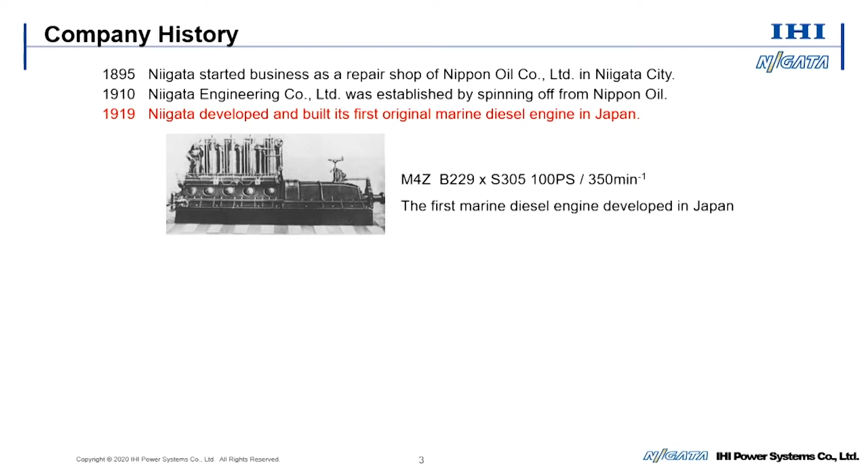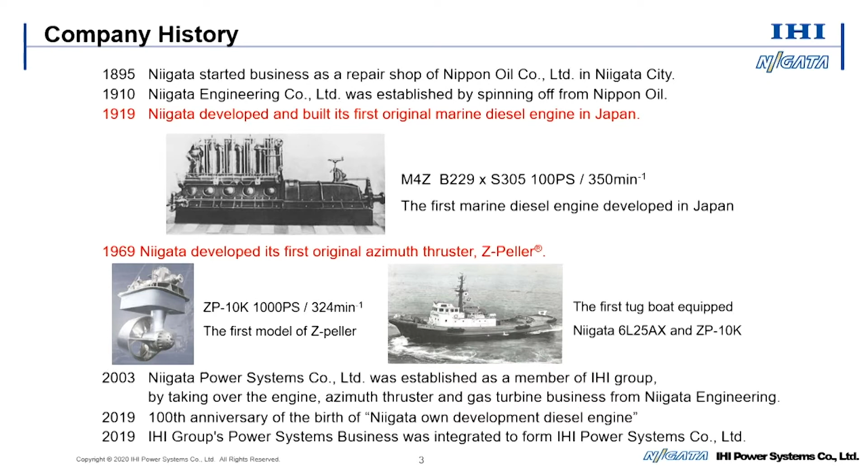This is Niigata history. In 1919, Niigata developed and built its first original marine diesel engine in Japan. 50 years later, Niigata developed its first original azimuth thruster, Z-Peller. Company name is IHI Power Systems. However, we are often called Niigata or IPS in general.

Niigata is one of the leading designers and builders of reciprocating and gas turbine engines for marine power plants and locomotives. In the marine field, IPS supplies Z-Peller as the best propulsion package for tugboats and offshore support vessels. Of course, our products are used for other types of ships, such as fishing vessels and cargo ships.

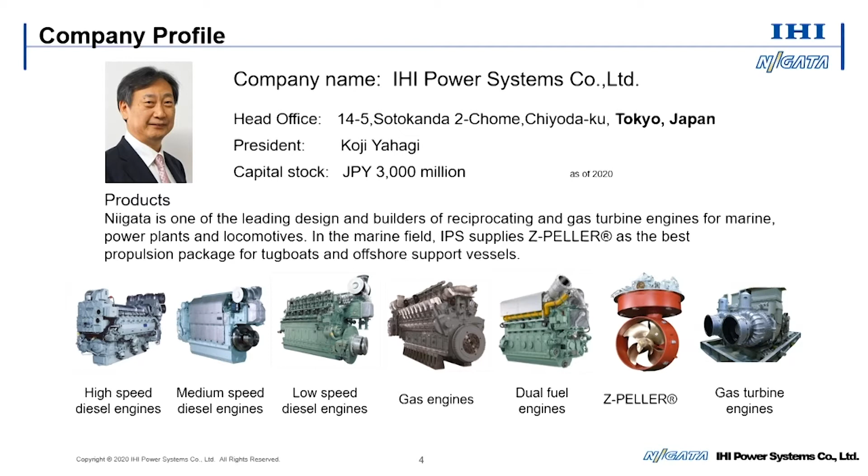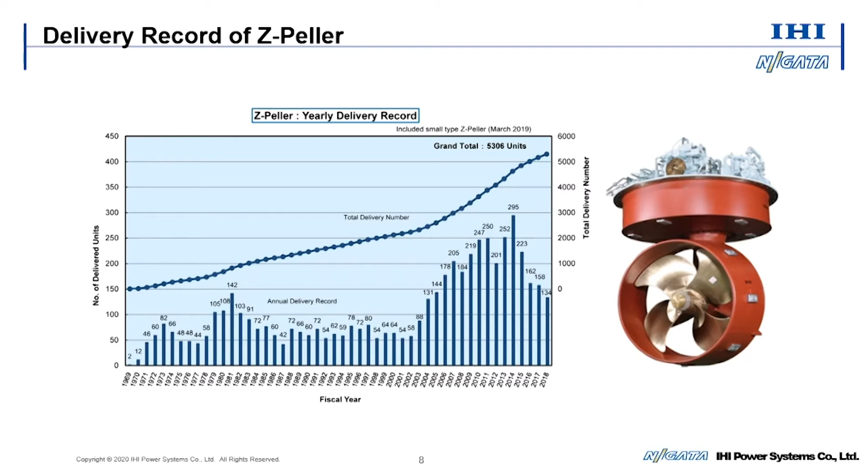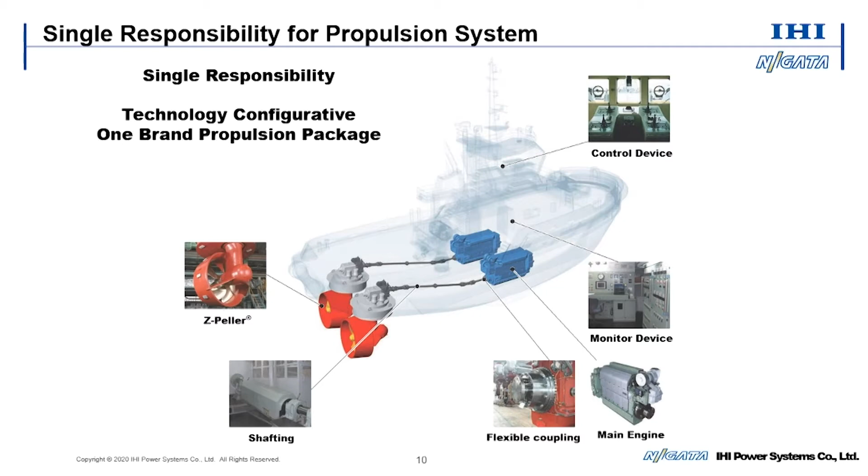Our strong point is single responsibility for the propulsion system. We handle these products: main engine, flexible coupling, intermediate shafts, Z-Peller, control device, and monitor device for the propulsion system in a single bundled package. Customers do not need to worry about mismatch in the propulsion system, be it capability, capacity, or performance, and so on. And we can also realize various requests such as bollard pull and vessel speed for the propulsion system. Customer support is also handled as single responsibility. Customers don't need to call many manufacturers for service.

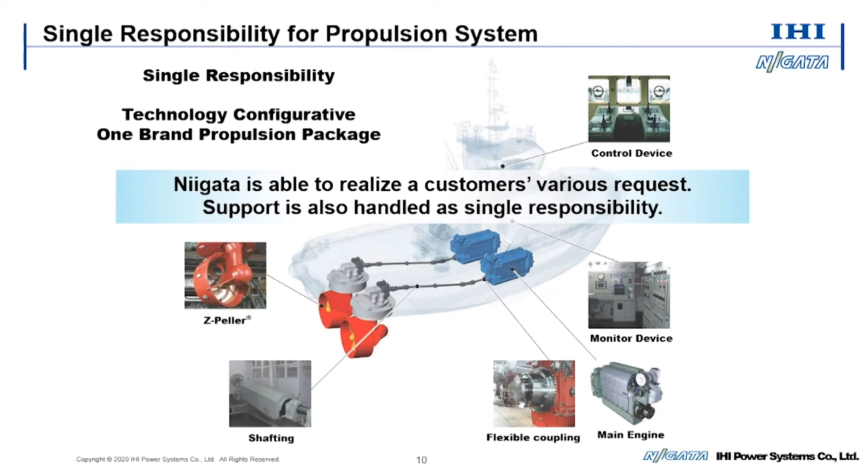This table shows our propulsion package. The left side column shows bollard pull values of a package, the middle columns show main engine model, engine speed, and rating power, and the right side columns show Z-Peller model. For fixed pitch propeller, middle range power packages from 40 tons to 80 tons are popular for harbor tugboats. Higher range power packages from 70 tons to 100 tons are popular for offshore support vessels and anchor handling tugboats. For controllable pitch propeller, the bollard pull values of packages are from 45 tons to 110 tons.

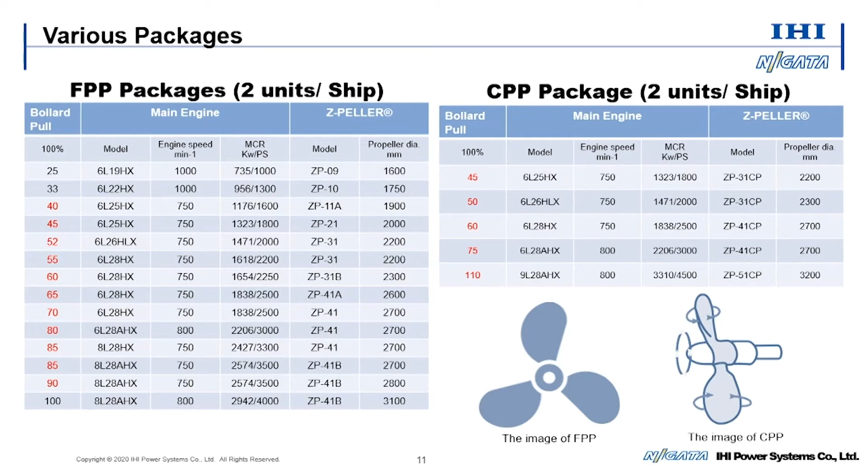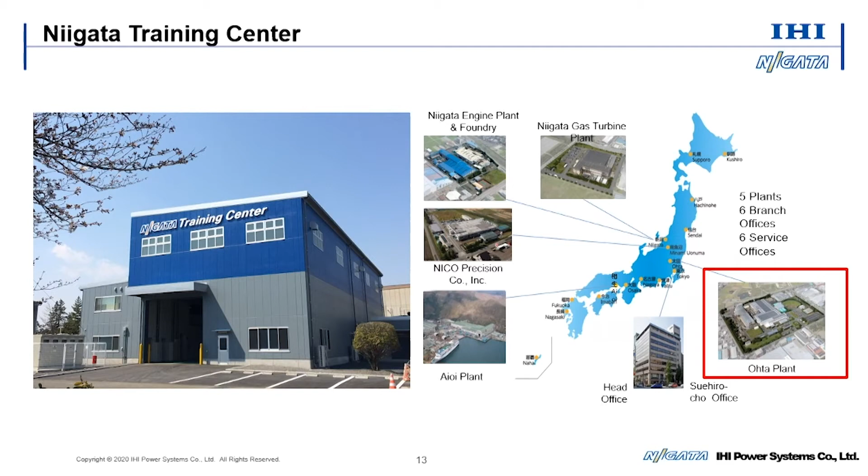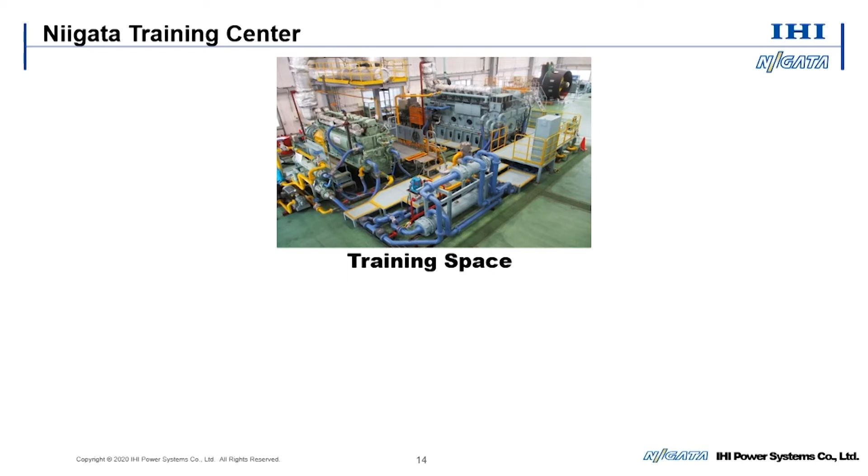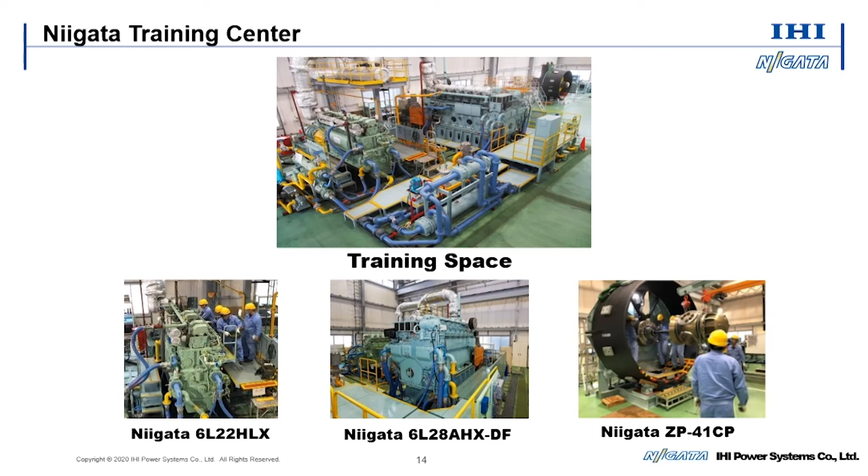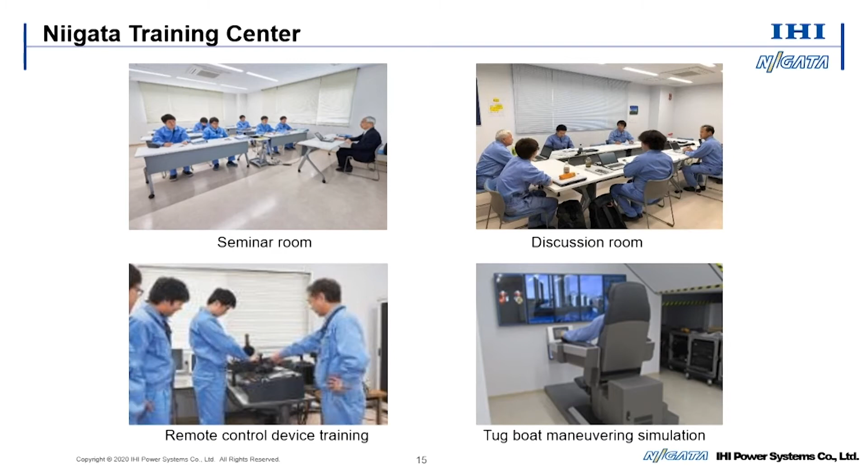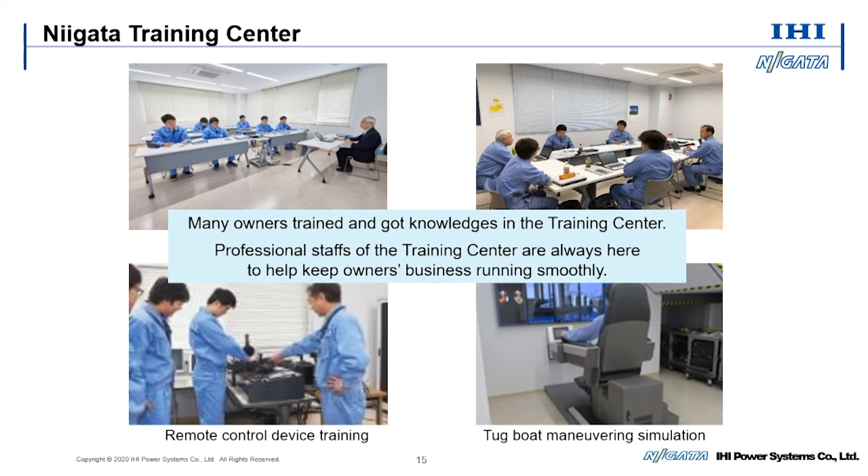In detail, middle speed engine 6L22HLX, dual fuel engine 6L28AHX-DF, azimuth thruster Z-Peller 41CP. Various training is possible, such as parts disassembly and assembly training. The training center has not only engine and Z-Peller training spaces, but also various facilities as shown in these pictures. Actually, many owners have been trained and received their certificates as our approved engineers in the training center. Okay, that's all I wanted to say about our technical support.

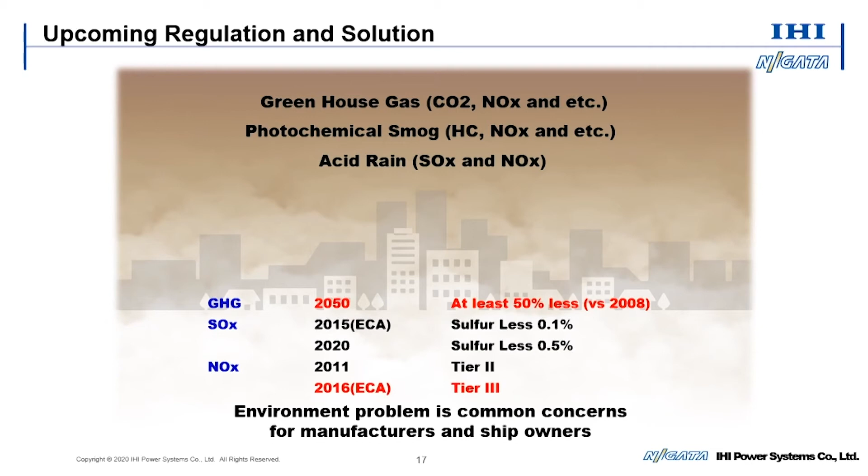Fourthly, I'd like to talk about dual fuel engine. Global environmental problems such as greenhouse gas, photochemical smog, and acid rain are getting more and more serious. These are current and upcoming regulations for the above problems. These regulations, especially those in red wording, are important for the shipping industry. Therefore, green ship technologies are necessary for the industry's future.

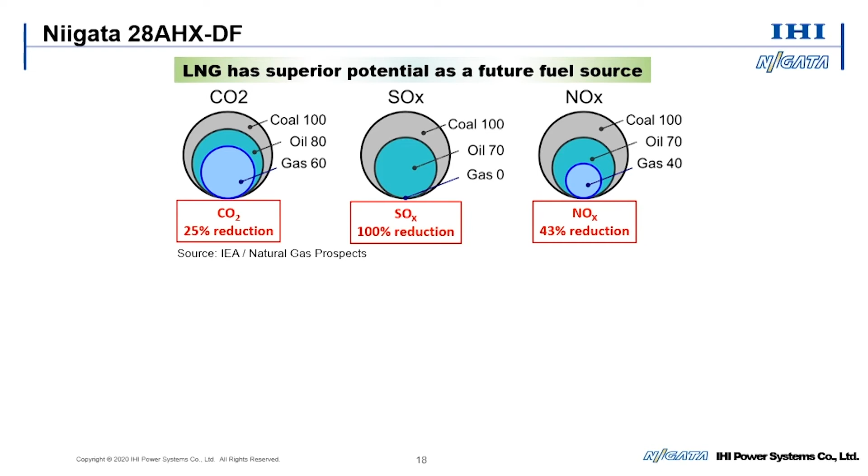LNG is a leading candidate as a clean fuel of the near future. As you can see, LNG has superior potential as a future fuel source. Our dual fuel engine, Niigata 6L28AHX-DF, uses LNG as a main fuel. This graph shows NOx regulation tiers. In gas operation, when this engine uses LNG as a fuel, the amount of NOx emissions satisfies Tier 3.

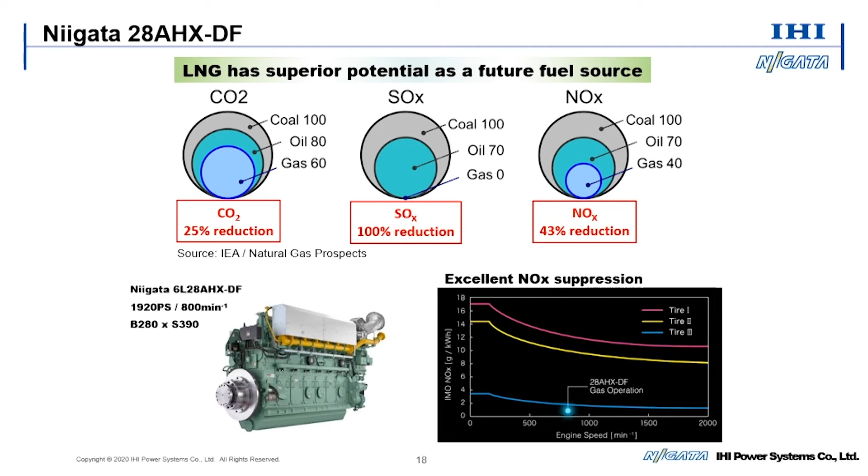This table shows main specifications. Diesel oil is also used as a pilot fuel. This dual fuel system realizes high response speed for tough situations. Perhaps you worry that the calorie of LNG is less than diesel oil and the response speed of a gas engine is slow. Also, perhaps you worry that this dual fuel engine cannot apply to the rapid load situations of a tugboat. Let me say the result. You don't need to worry.

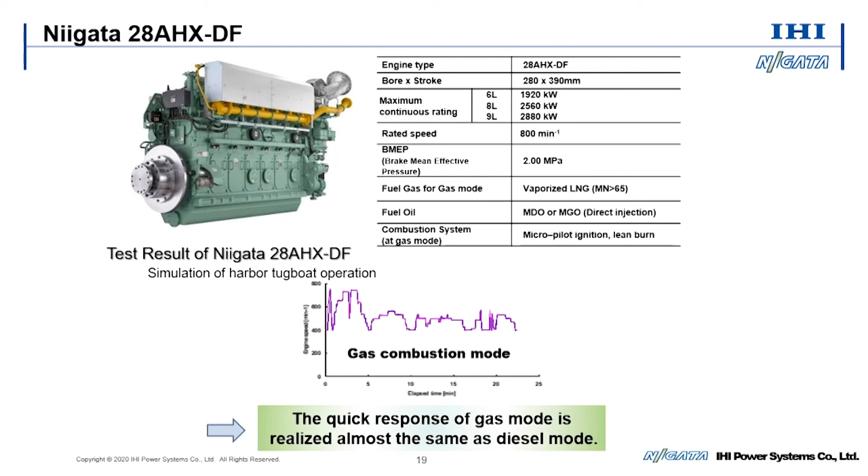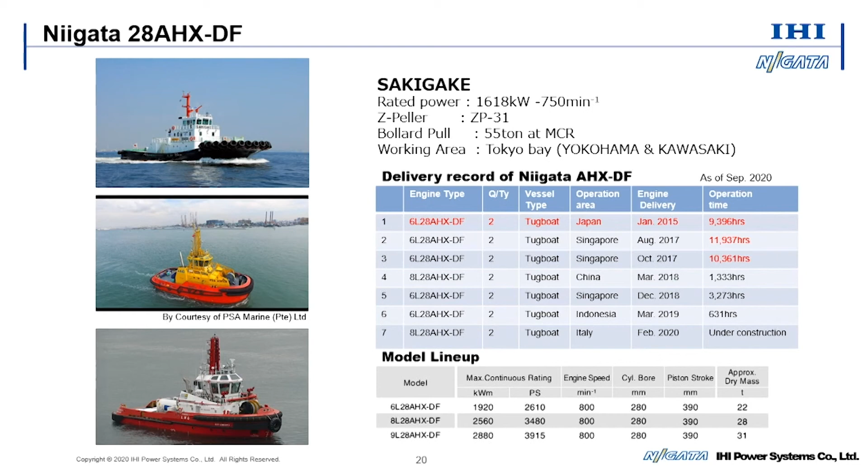Let's turn to the delivery record of our dual fuel engine. The left side pictures are tugboats equipped with Niigata dual fuel engines. This table shows the delivery record of Niigata AHX-DF. Operating time of some tugboats is over 10,000 hours. That means these tugboats are used equally to a typical tugboat having a diesel engine. This table shows the model lineup of AHX-DF. AHX-DF has a wide power range. So, I explained our dual fuel engine.

Finally, I'll talk about green ship technology. Our dual fuel engine itself is able to satisfy Tier 3 regulation. However, it is possible to satisfy the regulation for a diesel engine by applying an SCR system. We also handle SCR system devices. As environmental regulations for specific areas have been issued in recent years, we believe demand for SCR systems is going to increase in the near future.

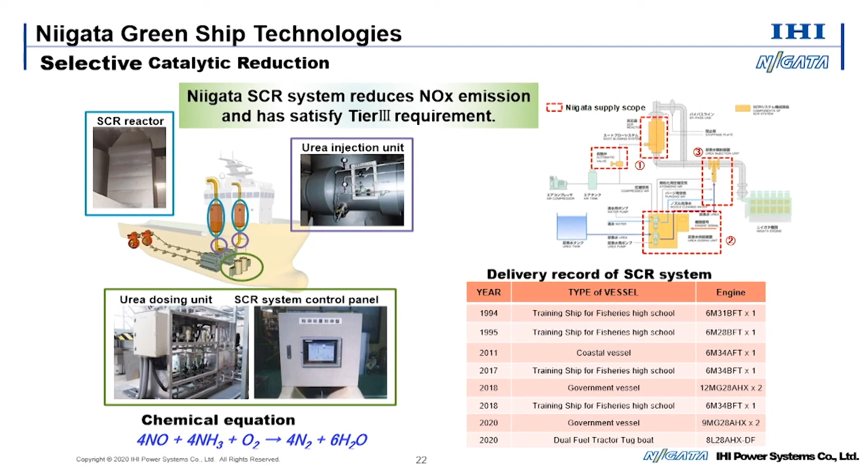We have been approaching and handling electrical drive systems. We delivered a diesel electric hybrid system for a tugboat in 2013. This is the first tug with a diesel electric hybrid system. We also handle electric propulsion systems.

For another important approach, we are developing an ammonia hybrid combustion system. Normally, quite a lot of carbon dioxide gas is generated by burning fuel oil. Ammonia is a carbon-free molecule. However, it is difficult to burn steadily because the combustion temperature range is narrow. Niigata has a strong point in knowledge and technologies for dual fuel combustion systems. Applying the dual fuel system to an ammonia diesel hybrid, the amount of carbon dioxide gas emission can be reduced. That's all I wanted to say about our green technologies in this talk.